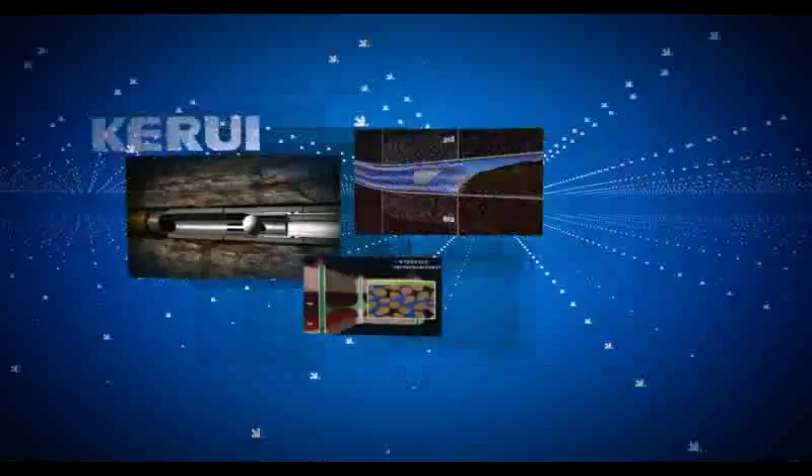Oilfield Integration Technology Services Provider, Oilfield Comprehensive Program Solutions Provider. The Oilfield Services Division of Kerui Holding Group is committed to providing the best services and the most practical products for oil fields all over the world.

Kerui provides professional nitrogen and nitrogen foam services, acidizing and fracturing services, coiled tubing services, and heavy oil thermal recovery services. The business of Kerui covers major oil fields worldwide and has achieved good results in enhancing recovery.

Nitrogen and nitrogen foam services have wide applications. Operations and production services for all types of oil fields have obtained good effects.

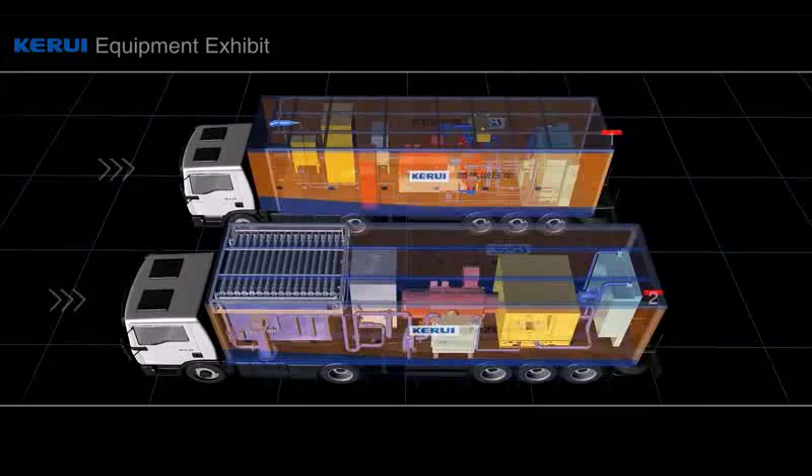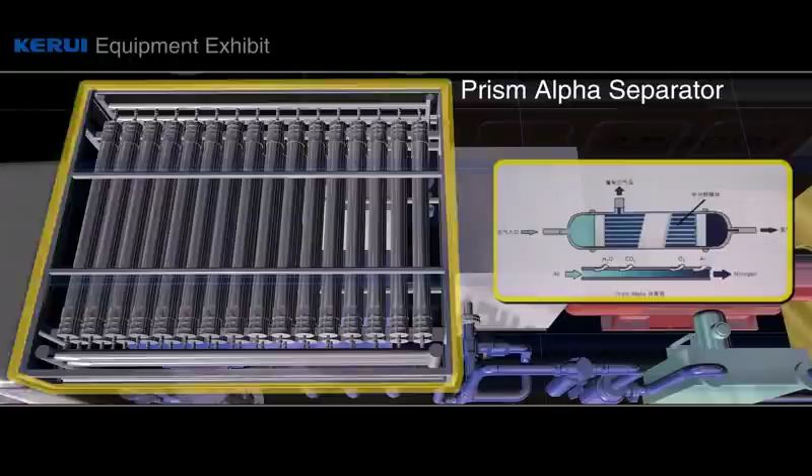Nitrogen generation is realized by means of membrane separation, using the difference in coefficient of solubility and diffusivity of various gases in the hollow fiber membrane to enrich nitrogen from the air. Then a booster pressurizes the nitrogen to a certain purity and makes it ready for use.

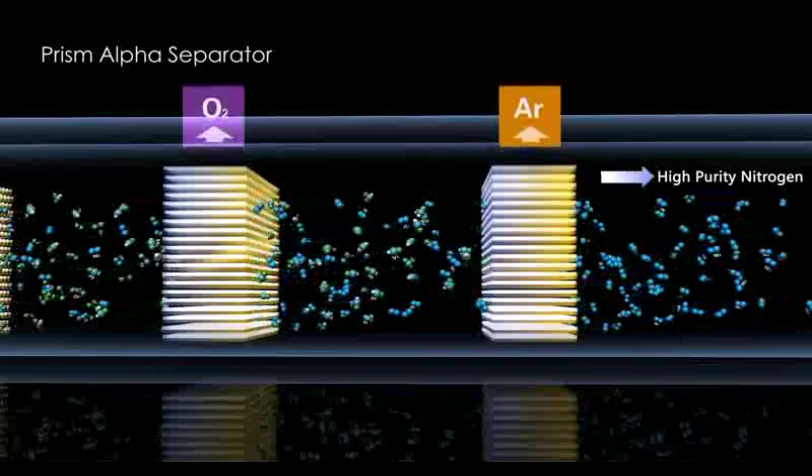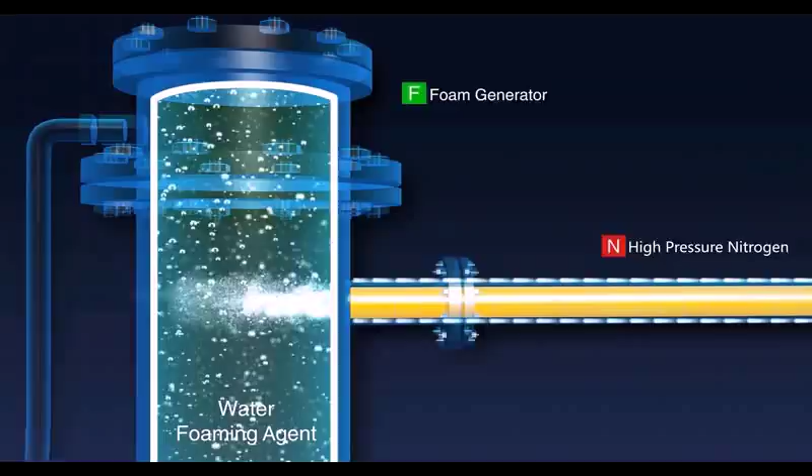High-pressure nitrogen and a foam solution are mixed by a foam generator, which forms a stable nitrogen foam liquid. Nitrogen foam liquid is featured with adjustable density, high stability, little affected by normal temperature and pressure change, high viscosity, good cuttings transportation, and shear thinning.

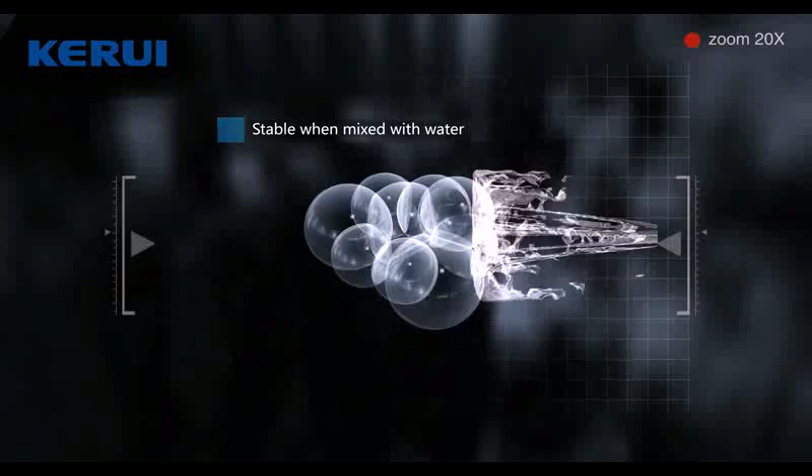It is easier to plug high permeability layers than lower ones. Foam decomposes when mixed with oil and keeps stable with water, so it is easier to plug the water zone than the oil zone.

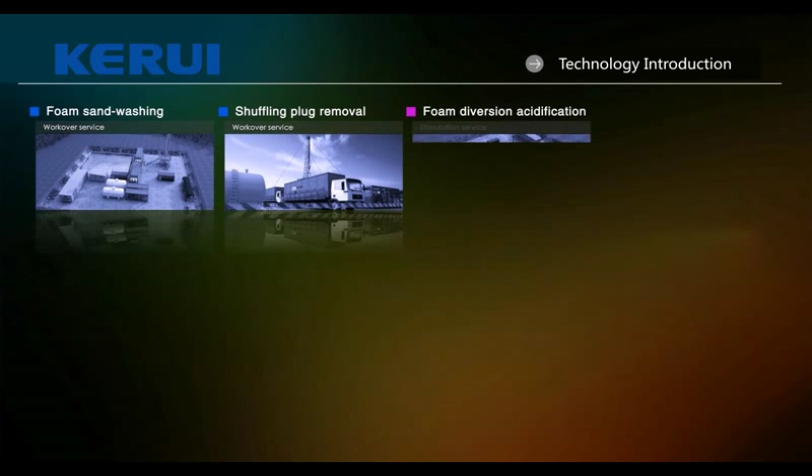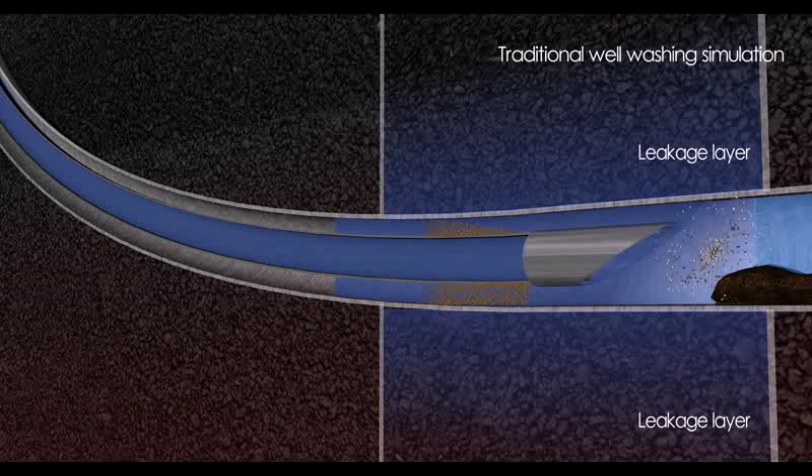Foam sand washing. Severe leakage occurs when using normal flushing liquid in wells with low reservoir pressure, causing difficulty to establish flushing circulation and leading to sand sticking and other accidents easily.

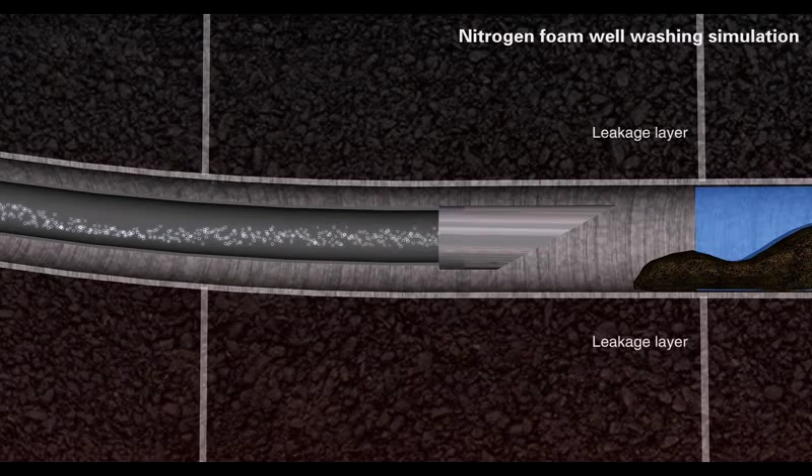The density of foam fluid is low and easy to adjust. It can successfully establish flushing circulation in the oil casing and result in less leakage and formation contamination.

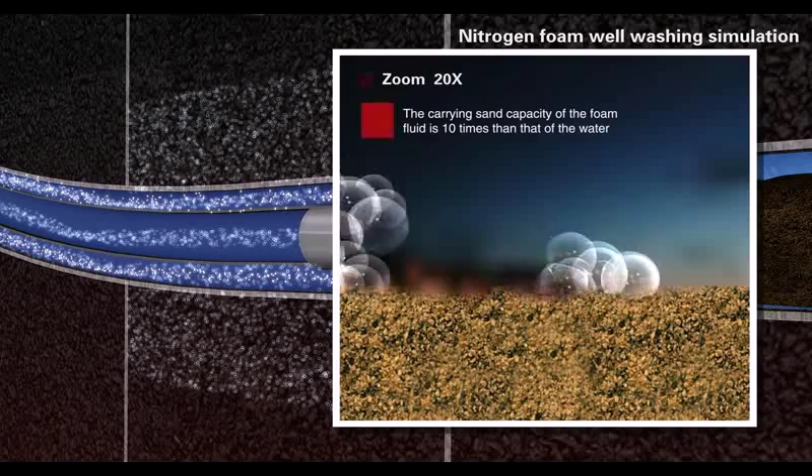The viscosity of foam fluid is high and the frictional resistance is low. The sand carrying capacity is 10 times that of clean water, carrying gravel out of the well bore completely, particularly suitable for horizontal well sand washing.

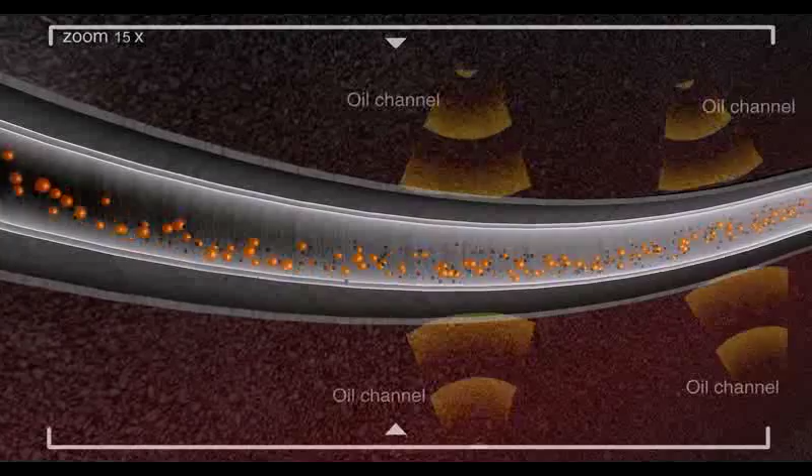Shuffling plug removal. During the exploitation of oil wells, impurities in the formation migrate into the near wellbore with the formation fluid, producing blockage that blocks the oil flow channels and causes the decline of production.

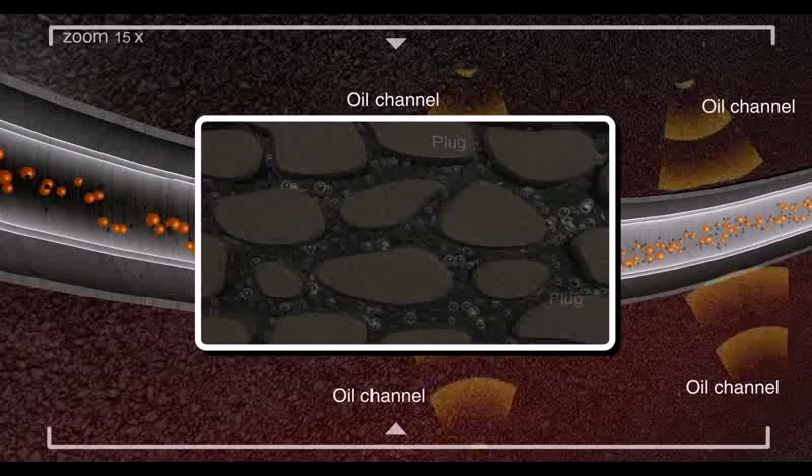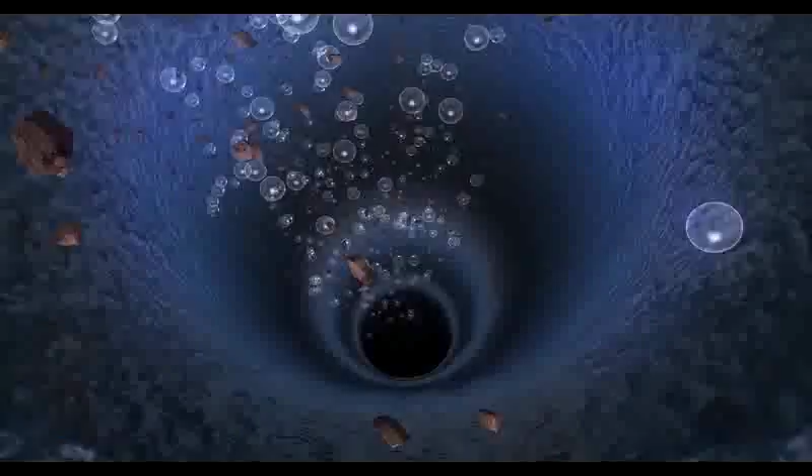Utilizing foam huff-puff and circulation shuffling technology, the low density of foam fluid establishes relative formation negative pressure in the bottom of the well, which makes the formation fluid spray at high speed, discharging the blockage near the wellbore and carrying contaminants out of the wellbore using the strong carrying capability of the foam.

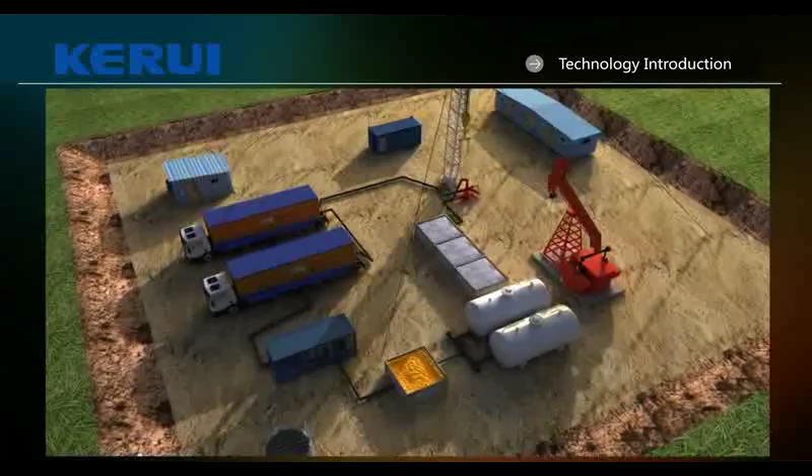Foam diversion acidification. The result of conventional acidification in heterogeneous formations, oil-water coexisting layers, re-acidizing, and leakage wells is not satisfactory.

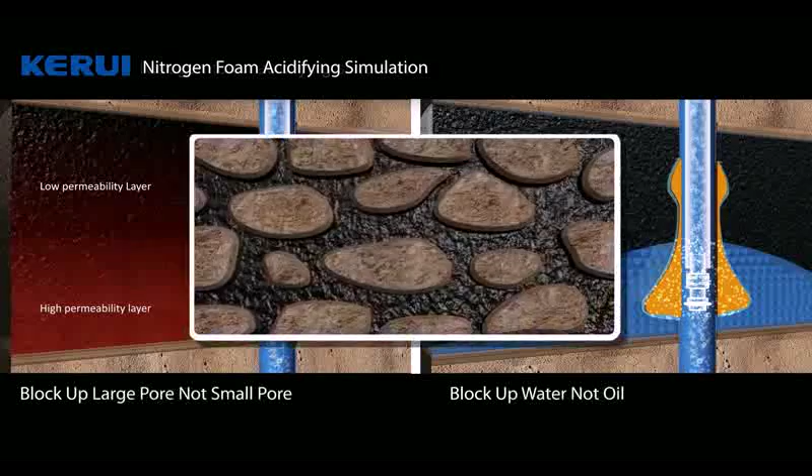Foamed acid has acidification capacity and foam characteristics simultaneously. It plugs big pores, not small pores.

It plugs water, not oil, being selective on different permeability formations and oil-water layers to achieve the purpose of acid well distribution and diversion acidizing. The reaction speed of foamed acid acidizing is slow, which could make reservoir deep acidification come true.

Foam flooding in water gas injection wells. The traditional development of water gas injection is likely to cause water channeling, gas channeling, and low displacement efficiency due to the heterogeneity of the formation and the viscosity differences between water, gas, and reservoir oil.

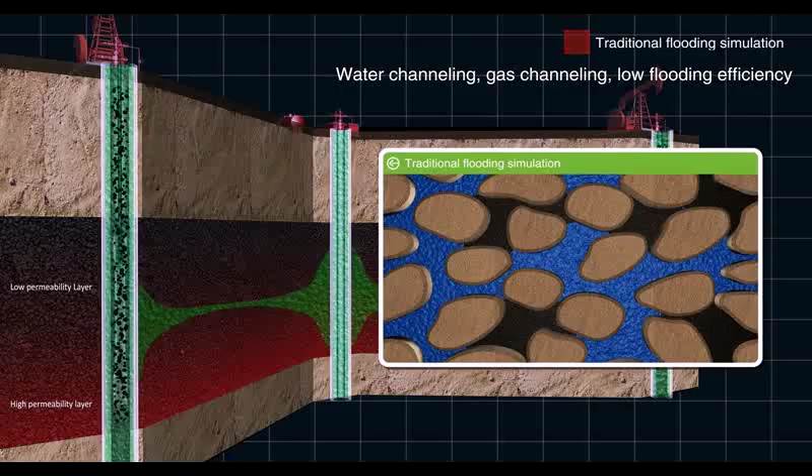Using nitrogen foam flooding can increase the swept volume and displacement efficiency, improve the oil-water mobility ratio, adjust the injection profile, and enlarge the sweep volume.

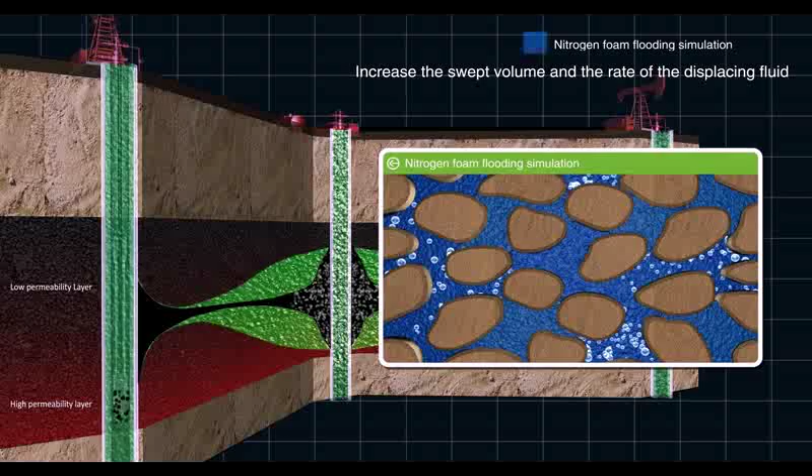Foam defoams when it comes into contact with oil and is stable when it comes into contact with water. It can form a stable jam where the water saturation is high, without plugging the oil flow path.

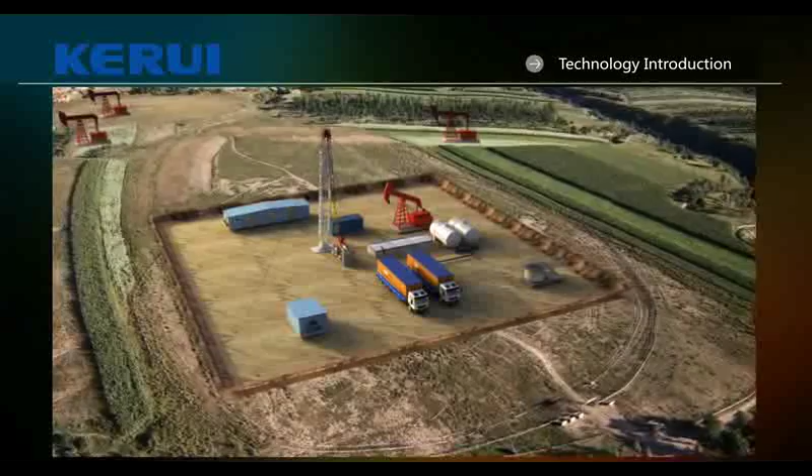Nitrogen foam profile in steam huff-puff wells. Steam channeling is a serious issue in heavy oil steam injection thermal recovery wells.

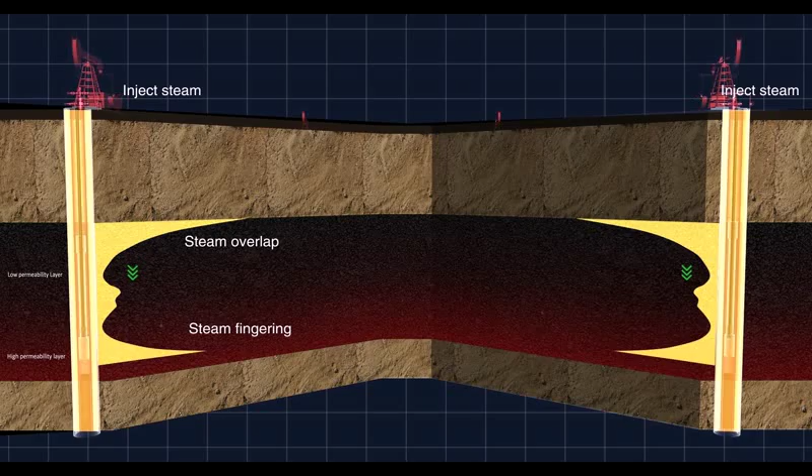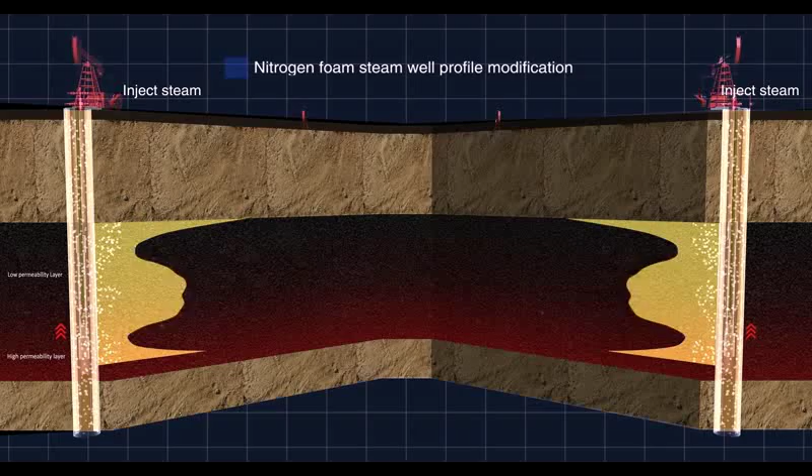This could increase the steam injection of medium-low permeable layers and high oil saturation layers in order to make steam well distributed and improve the utilization of steam.

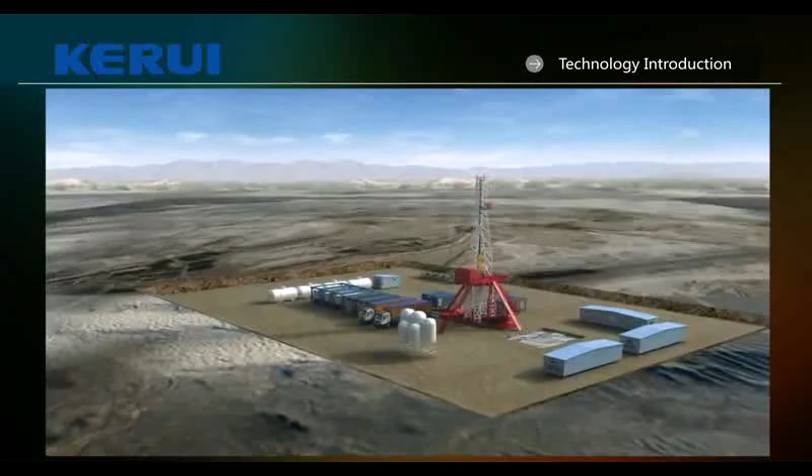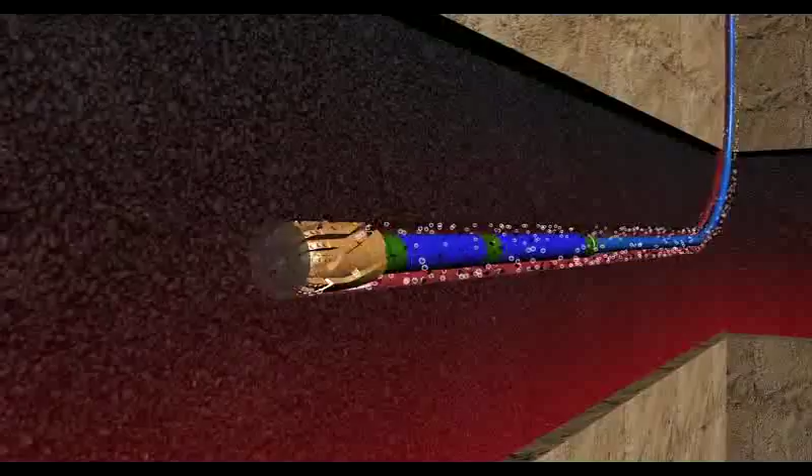Foam underbalanced drilling. Using foam underbalanced drilling makes it easy to adjust the gas-liquid ratio and achieve underbalanced conditions. The performance of the foam carrying property is good. In the condition of low speed drilling fluid circulation, the performance of liquid and scrap carrying is also good.

Strengths: 1. Promptly identify and effectively protect the reservoirs. 2. Evaluate the reservoirs while drilling. 3. Improve the rate of penetration. 4. Avoid lost circulation and prevent sticky suction and stuck drill. 5. Improve exploration efficiency as a whole.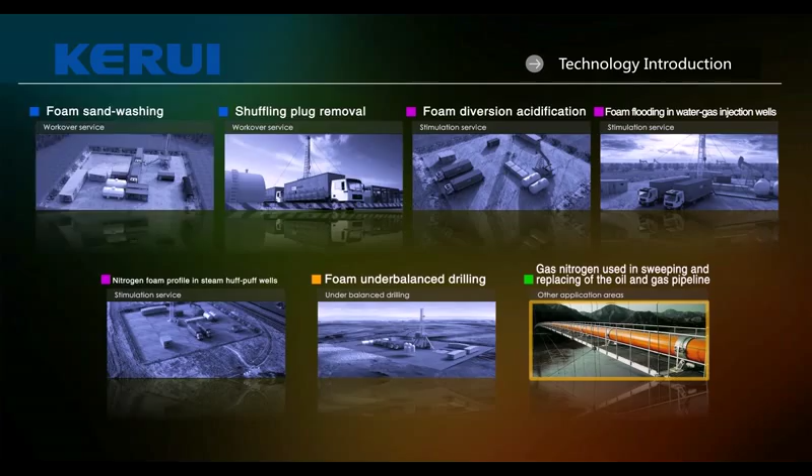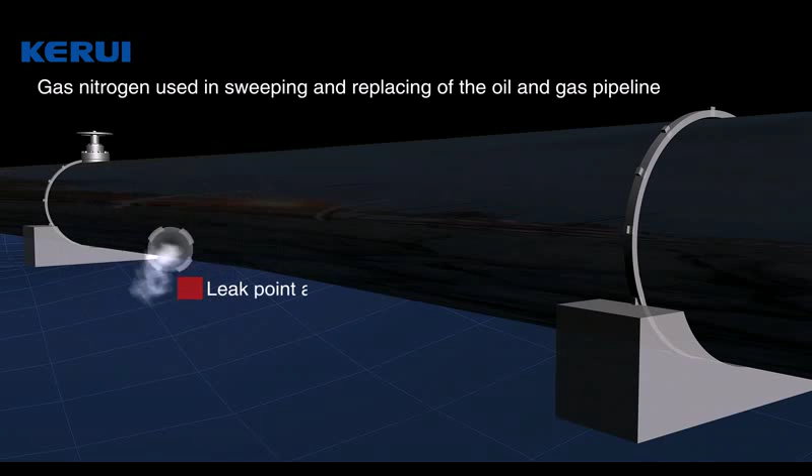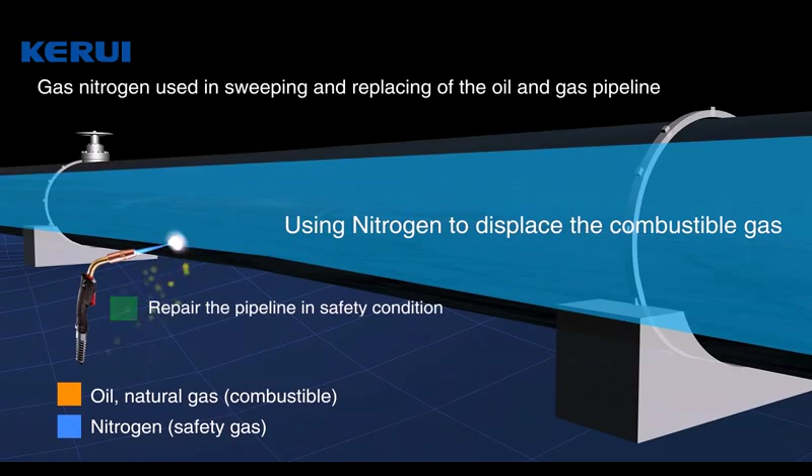Nitrogen can also be used in purging and replacing the pipeline of oil and natural gas. It is widely used in low permeability oilfield gas injection flooding and maintaining pressure production.

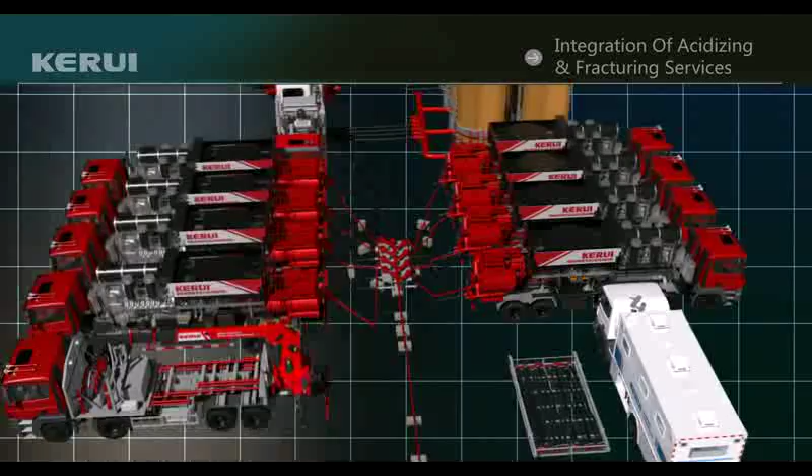Kerui Acidizing and Fracturing Company Limited is affiliated with the Oilfield Services Business Division of the Kerui Group. Our pumping services company has a full range of acidizing and hydraulic fracturing equipment, supported by our own fit-for-purpose Kerui equipment manufacturing facility that includes integrated conventional and unconventional acid fracturing engineering, acidizing and fracturing technology services.

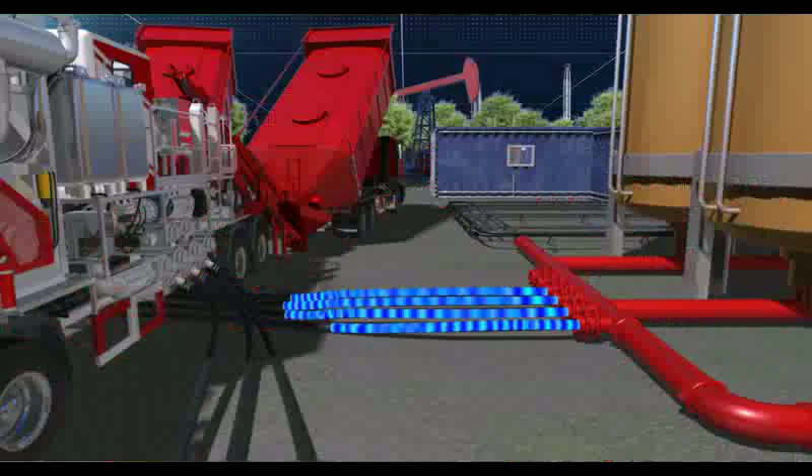The advanced acidizing and fracturing equipment. Our company's full range of fracturing units include the Type 1200, Type 2250, Type 2500, and Type 3000 series of pumps that are suitable for all acidizing and fracturing applications.

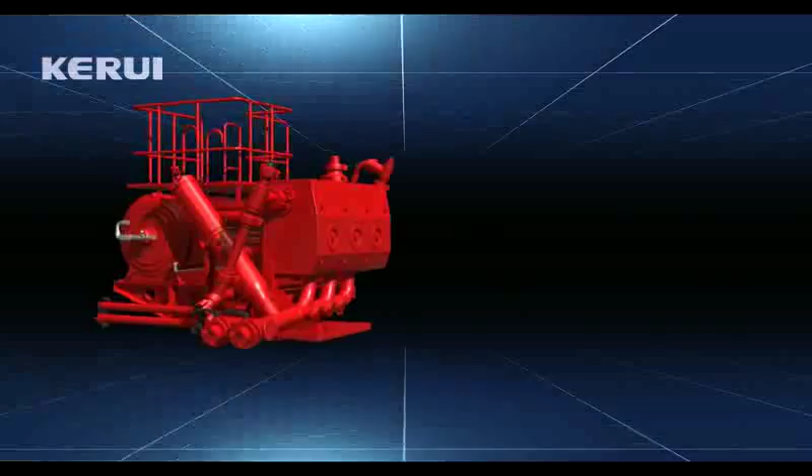The full range of Kerui equipment for pumping services has a leading-edge state-of-the-art design and uses imported components from the United States with guaranteed quality and equipment reliability. The full range of Kerui fracturing equipment has high precision and is equipped with advanced and fully integrated intelligent control systems, real-time monitoring, and data acquisition capabilities that meet and exceed international standards, ensuring construction safety and reliability.

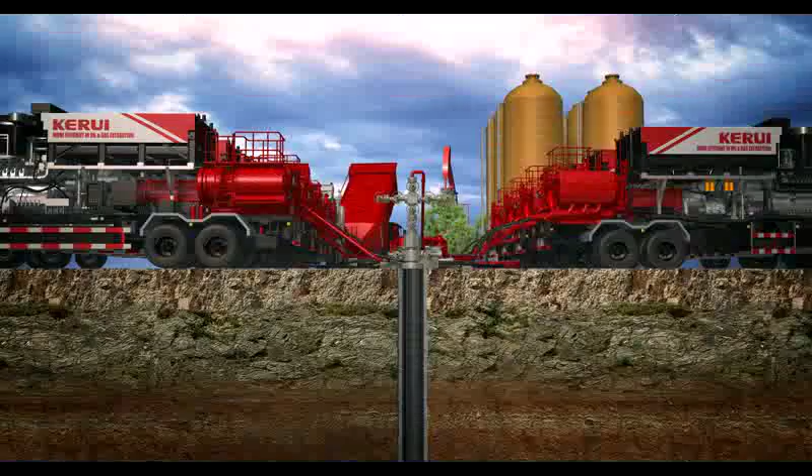Systematic reservoir stimulation and transformation technology. The Kerui Pumping Services Division is supported by an independent reservoir stimulation and technology department research institute which focuses on conventional and unconventional reservoirs. Our company has advanced stimulation technologies for conventional wells, tight sandstone reservoirs, coalbed methane, and nano-Darcy shale gas.

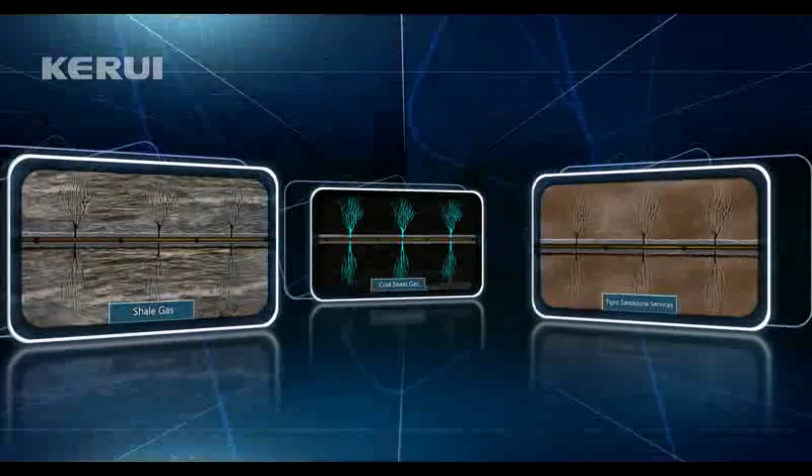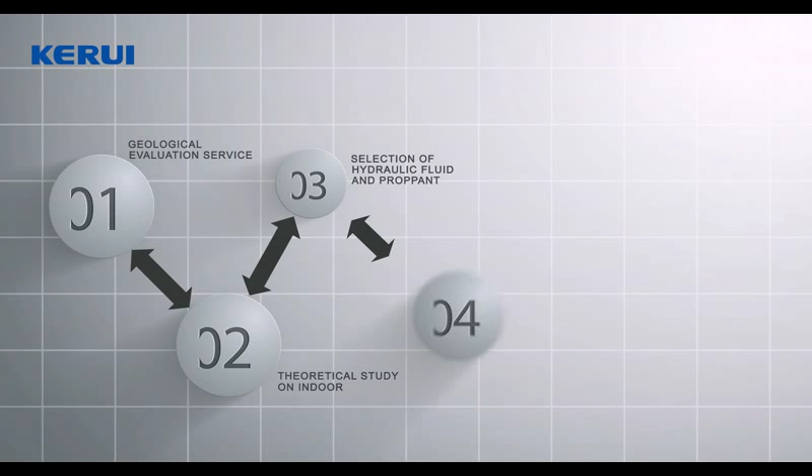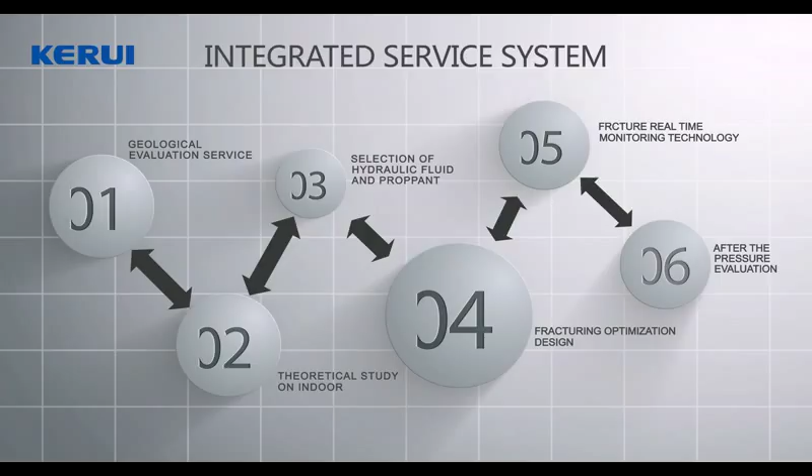We have a geological evaluation service for pre-treatment hydraulic fracturing support that includes in-house theoretical research, fracturing fluid selection, proppant selection, hydraulic fracturing optimization design, fracturing real-time monitoring technology, and post-treatment evaluation, where we can provide fracturing and acidizing treatment programs according to individual reservoir conditions.

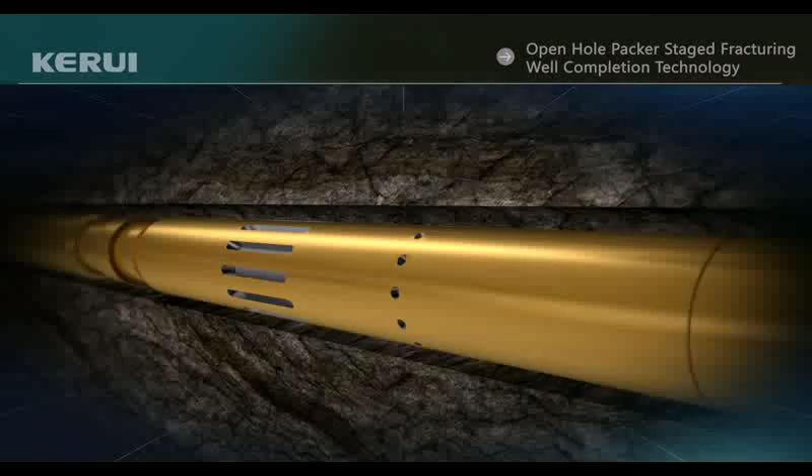Our company has developed leading-edge technologies for multi-stage fracturing of horizontal wells. Open-hole packer staged fracturing well completion technology: firstly, we install the completion technology liner string, which includes tools such as open-hole packers for zonal isolation and sleeve ports for establishing communication between the reservoir and the wellbore.

Secondly, the liner string is activated and operated from surface by dropping balls and hydrostatically building pressure to achieve effective zonal isolation and perform multi-stage fracturing operations.

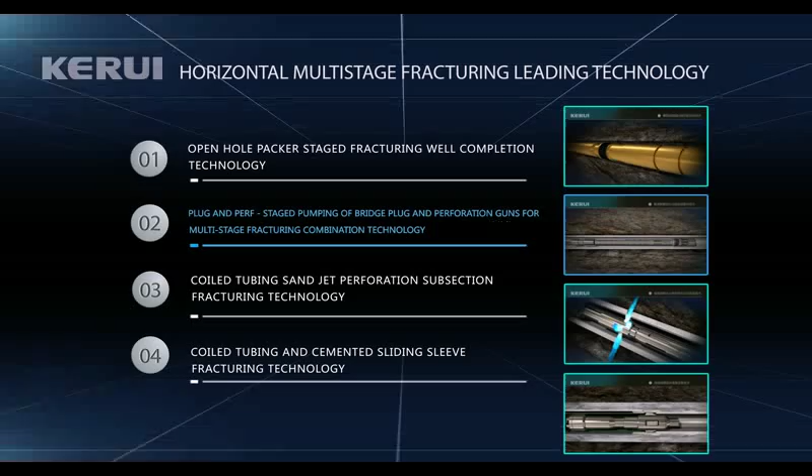Plug and perf: staged pumping of bridge plug and perforation guns for multi-stage fracturing combination technology. First, we use TCP tubing conveyed perforating and then proceed to casing fracturing. After the first stage is hydraulically fractured, a bridge plug is set.

Bridge plug and perforating guns for the consecutive stages are conveyed by way of wireline and pumping. After perforating, we pull out of hole and proceed to the next stage casing fracturing treatment. The above steps are repeated until the multi-stage hydraulic fracturing treatment is completed.

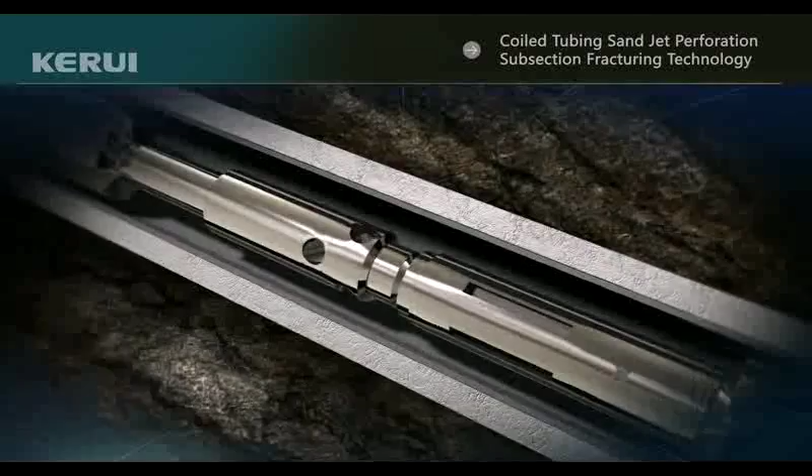Coiled tubing sand jet perforation subsection fracturing technology. At the corresponding reservoir depth, we perform abrasive perforating through coiled tubing with an abrasive perforating device for establishing communication between the reservoir and the wellbore, with zonal isolation achieved by a retrievable packer.

The hydraulic fracturing fluid is then pumped through the annulus to achieve high proppant concentrations. The coiled tubing is pulled up to the next section and the process repeated until the multi-stage hydraulic fracturing treatment is completed. Coiled tubing and cemented sliding sleeve fracturing technology.

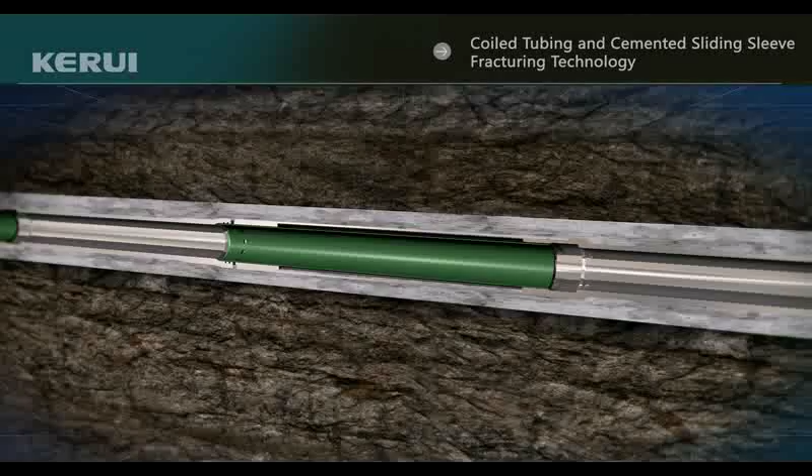We trip the coiled tubing well completion string with a fracturing tool and a straddle packer to the required well depth adjacent to a preset sliding sleeve. The preset sliding sleeve is opened hydraulically through the coiled tubing, and we can then proceed to fracturing operations through the coiled tubing.

After operations for each stage are completed, we pick up the string to the next stage and repeat the above process until the multi-stage hydraulic fracturing treatment is completed.

Powerful research, development, and design capability. Our company has an expert international-level fracturing team, consisting of subject matter experts from abroad and domestic, with high-level fracturing and acidizing skills and design skills, complemented by high-level technology and research and development. Fracturing and acidizing designs are optimized, with enhanced acidizing and fracturing results.

We have introduced a suite of three-dimensional fracturing design software, used for all aspects of fracturing simulation, design, analysis, optimization, production forecasting, economic evaluation, and real-time monitoring.

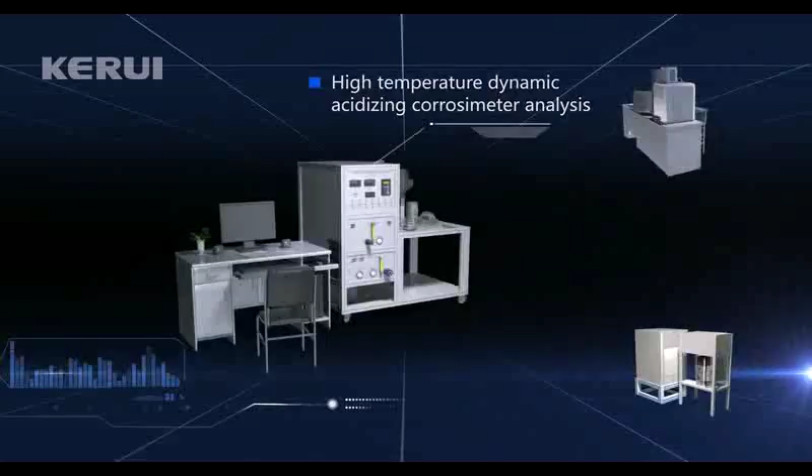We have established in China an acid and fracturing laboratory equipped with advanced acid and fracturing test instruments, including capabilities for high temperature and pressure corrosion resistance, high temperature dynamic acidizing corrosimeter analysis, and fracture conductivity testing for fracturing, plus fully equipped regional laboratories abroad.

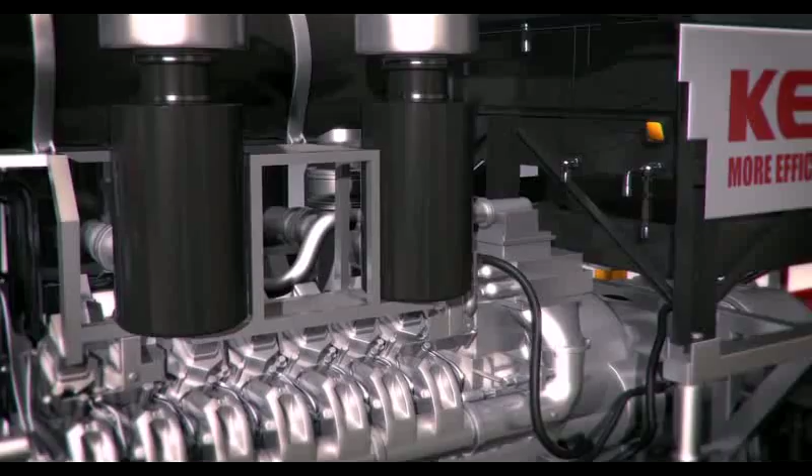Kerui Acidizing and Fracturing Company Limited depends on advanced technology, powerful drivers, and high-quality service to offer the best quality technology services for oil and gas field development for domestic and foreign markets.

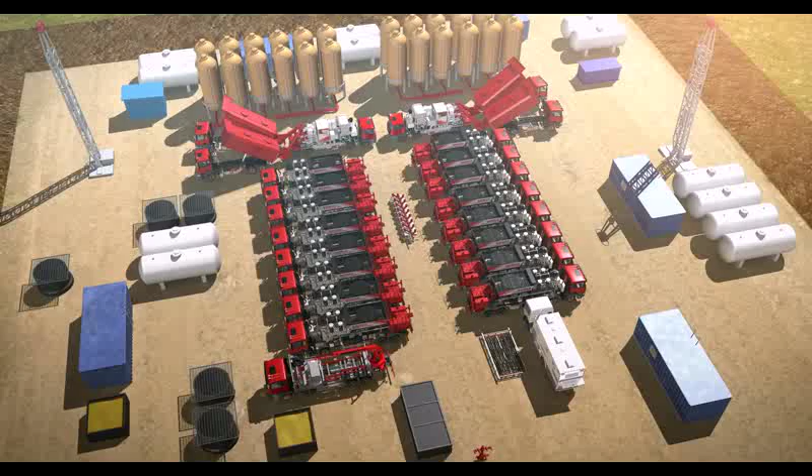Coiled tubing services.

Advanced equipment. Kerui Group Coiled Tubing Technology Services Corporation is affiliated with the Oilfield Services Business Division of the Kerui Group. There are three types of advanced equipment: skid type, special vehicle type, and trailer-mounted type, which includes a variety of sizes of coiled tubing equipment.

The injection head has the advantages of large load and stable operation, and it is equipped with the automatic protection device for overload and overspeed, which can meet the construction requirements.

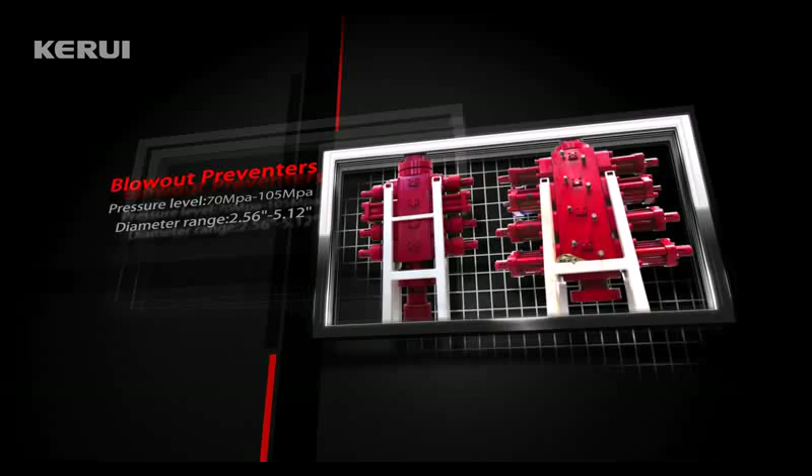The level for full-featured wellhead blowout preventers is 70 megapascal to 105 megapascal. The inside diameter is from 2.56 to 5.125, which can meet the needs of different operations.

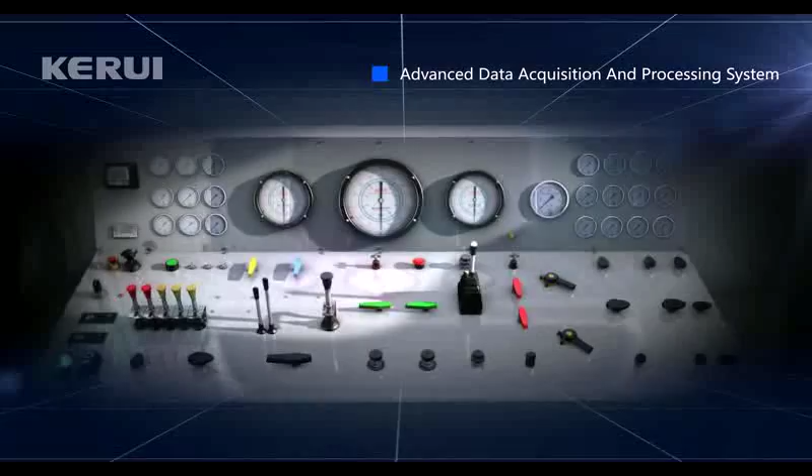Kerui is equipped with professional engineering simulation software and an advanced data acquisition and processing system. The sets of coiled tubing equipment are equipped with real-time instruments, with three advantages: run hydraulic analysis for downhole operation and record throughout the engineering.

Analyze the fatigue and yield strength of coiled tubing in real time and count the column length. Obtain detailed data by analyzing coiled tubing operation.

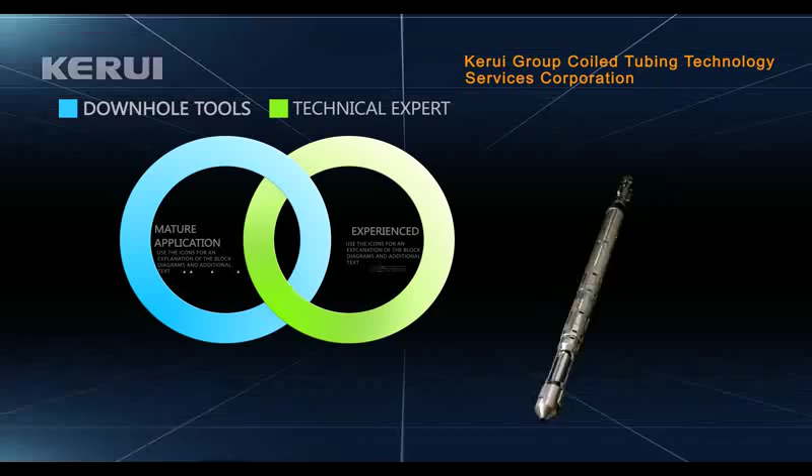Coiled tubing technology introduction. Kerui Group Coiled Tubing Technology Services Corporation has mature application of various downhole tools and technical experts with experience working. We can provide conventional downhole operations, stimulation operations of coiled tubing services, conventional downhole operations,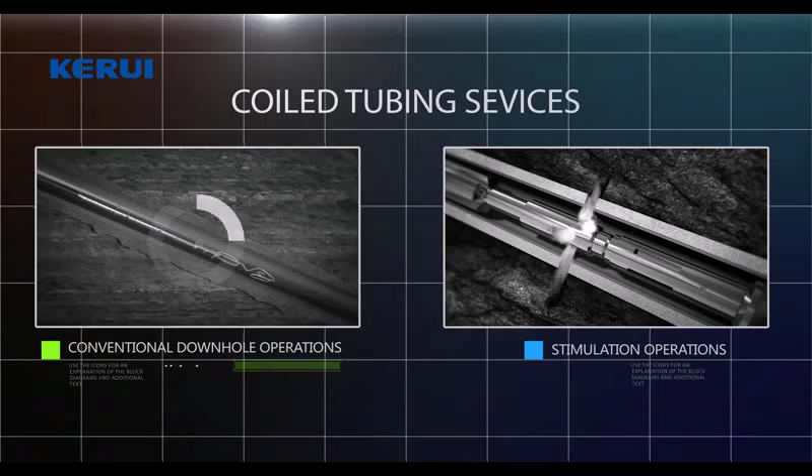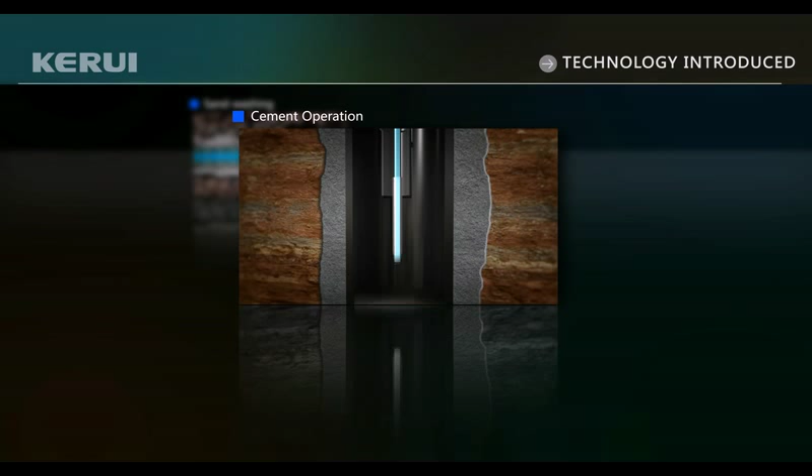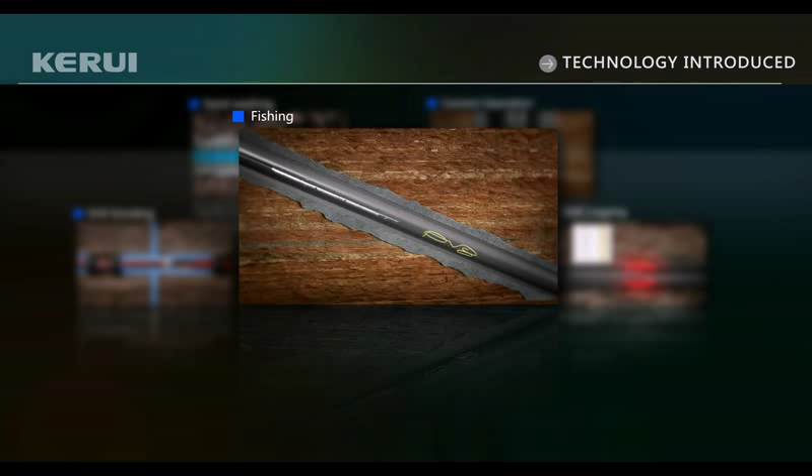sand washing, cement operation, drill grinding, cutting, well logging, fishing, hydraulic jet perforation, flowing back technical services.

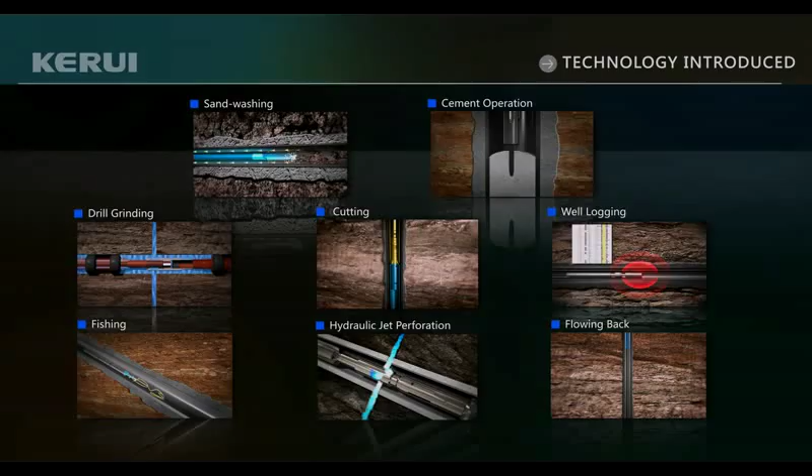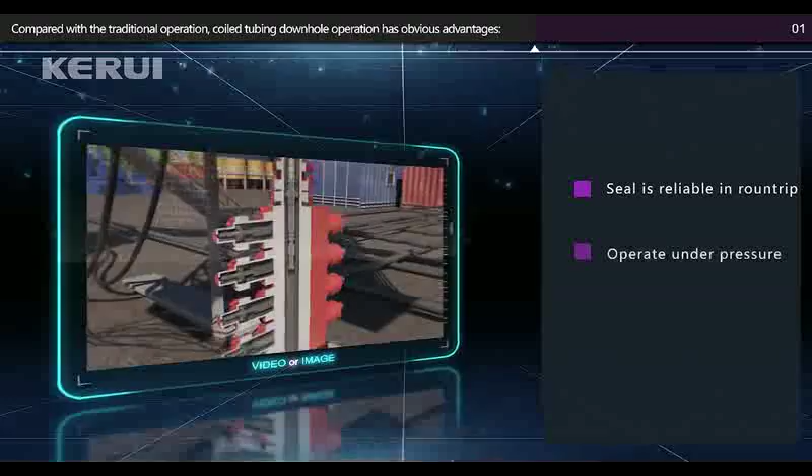Compared with the traditional operation, coiled tubing downhole operation has obvious advantages. Seal is reliable in round trip, operate under pressure, high safety in operation. No killing operation does less damage to the formation and effectively protects the reservoir.

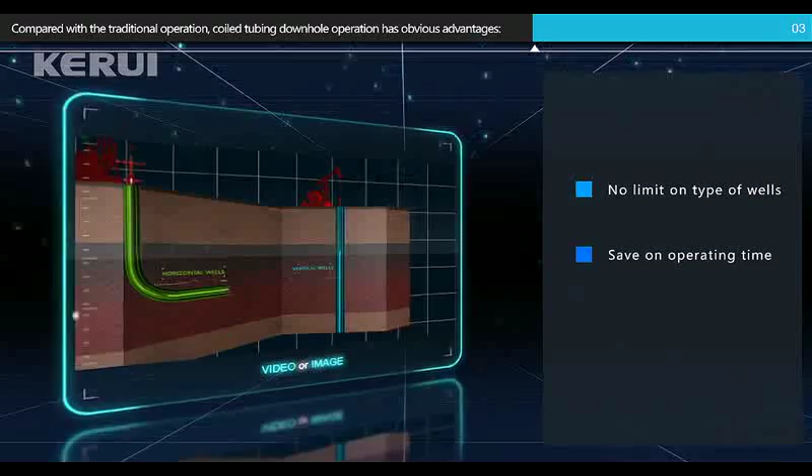No limit on type of wells, saves operating time, multi-depth and multi-level perforating in one operation. Operation through tubing can complete cleaning, cement operation, and drilling plug operation, avoiding frequent round trips to production string. Convenient operation, high efficiency.

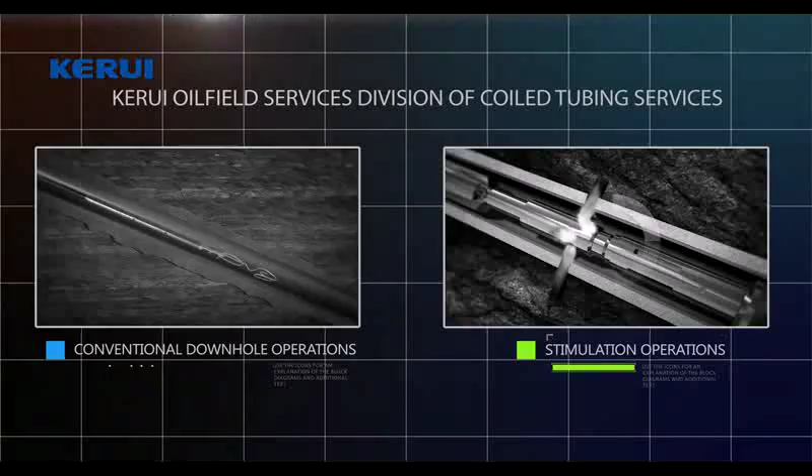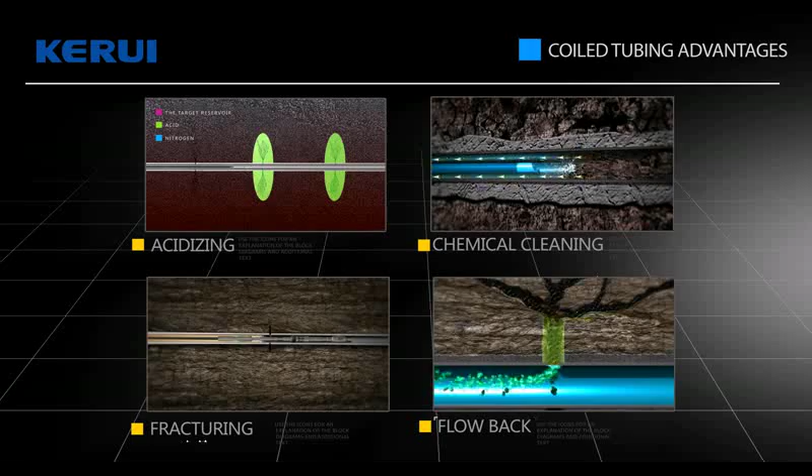Stimulation operations. Acidizing technology, combined sandblasting perforation and fracturing straddle packer technology. Formation damage in the process of oil and gas well drilling, completion and production will seriously restrict the production capacity of the oil well. Acidizing, chemical cleaning, and fracturing using coiled tubing on the target layer reduce formation damage.

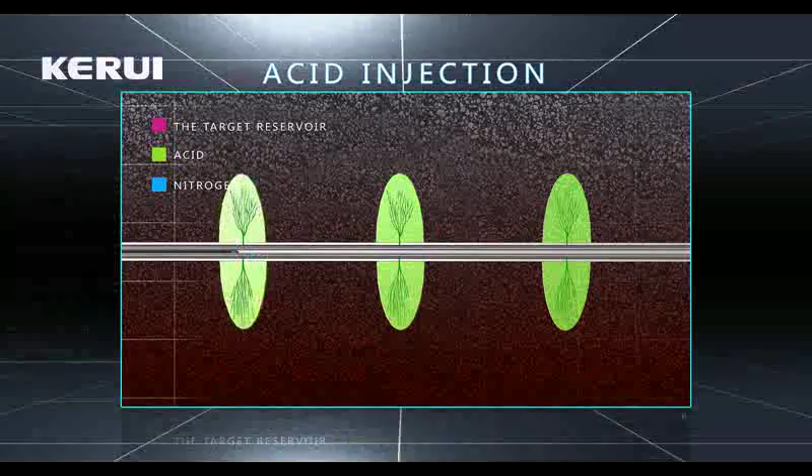Formation acidizing technology works directly in production wells. No need to kill the well. Inject nitrogen directly after the operation to flow back rapidly and resume production. Accomplish scale cleanout and declogging at the same time.

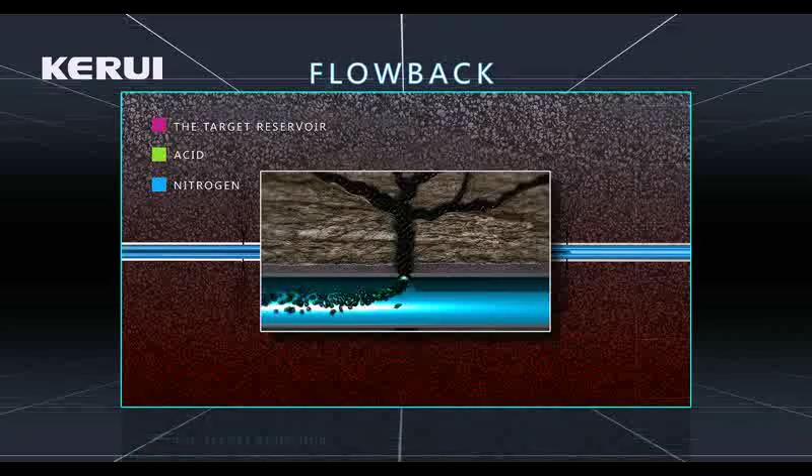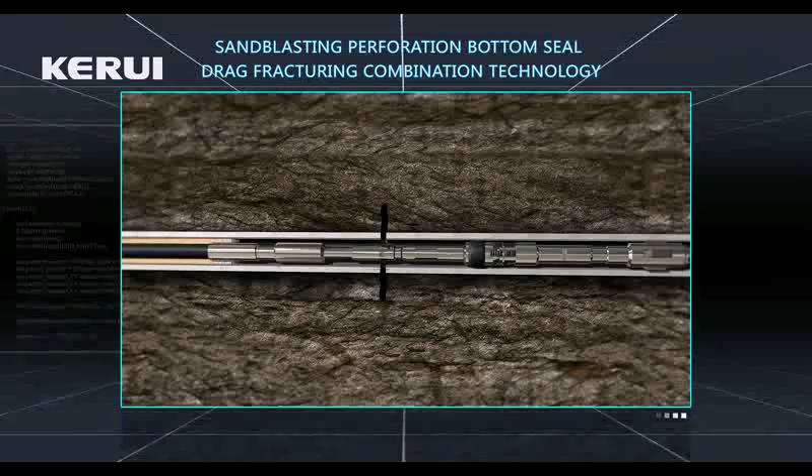Combined sandblasting perforation and fracturing straddle packer technology enables infinite class fracturing, fracturing the selective horizon, dispensing with the separate cleaning of bottom sand. Fast, efficient, and transfers in a short time. Monitor bottom pressure in real time and meet the production requirement after tripping out coiled tubing.

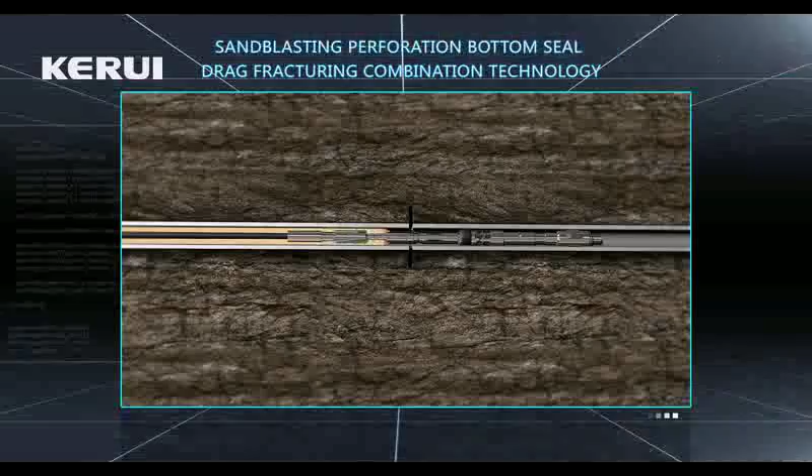The engineering service teams of Kerui Holding Group Oilfield Services Division serve all the world's major oil fields with advanced technology, stable and reliable equipment, and obviously increasing production.

Technology leading the future. Better service, higher quality. Make the acquisition of oil and gas more efficient. Kerui Group.